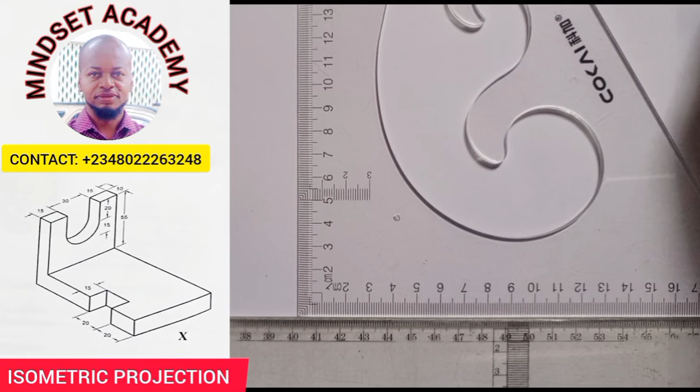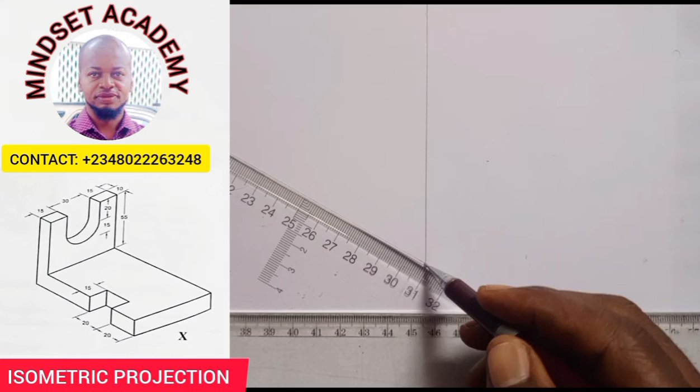When you hear the word isometric projection, the first thing you have to do is draw your isometric axis. Draw the vertical line this way, make it visible, and draw the inclined line at an angle of 30 degrees in this manner, and this also in this manner. So we need to now get our height, width and length.

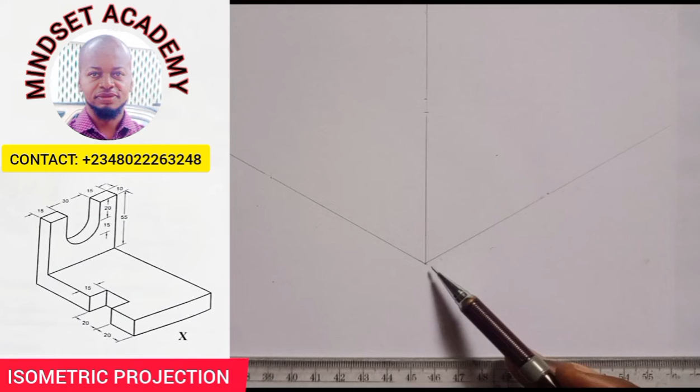Now with what we have here, how can we detect our width? From the top here, remember that everything you see along this direction is parallel. So if you look at this top, the entire top is given to be 15 plus 15, that gives us 30 plus another 30, that gives us 60. So my entire length here is 60. I'm going to measure 60 millimeter from this side.

So from 0 here, I'm going to measure 60. And this is where the 60 is.

Can you see that? And the entire height here can be given, since the thickness is 10, it means that the thickness here also is 10, because it is uniform. So if I add the 10 from here to here with this 55, I'm going to be having 65. So my height here is 65. So from this point 0, this is what we have here to be 65.

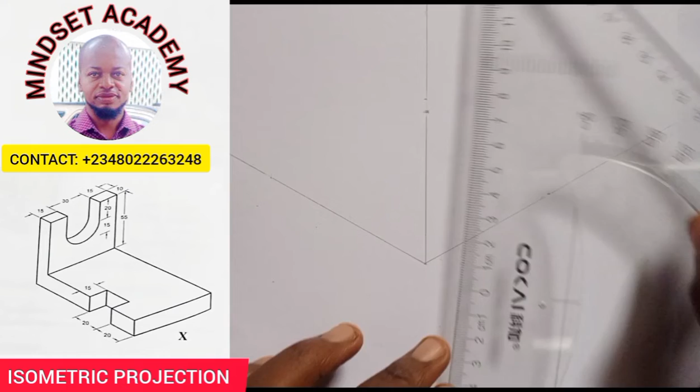Then the entire length here, as it is not given, we can see it is given to be 85. So since it is not given, so 85.

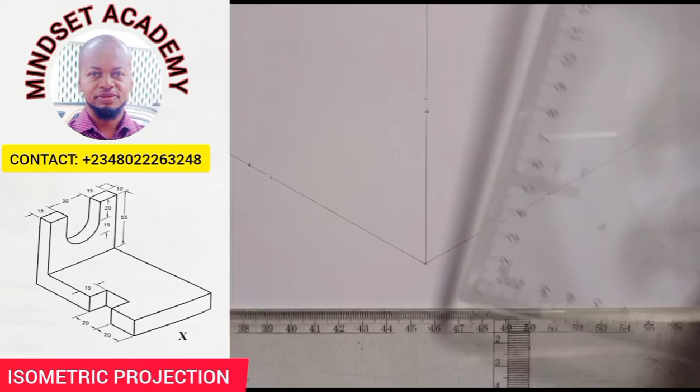Right, so we have from here to this point here, and that's 85. So I'm going to use this to form my box, in this manner. I need to form a box in this manner.

Easily bring it back. So this is the box that I'll take up a little bit so we have a clearer view. So this is what we have. So from here, I'll carve out my image.

And if you look at the image carefully, from this point to this point is thickened. So I can easily take my instrument and thicken this with my pencil.

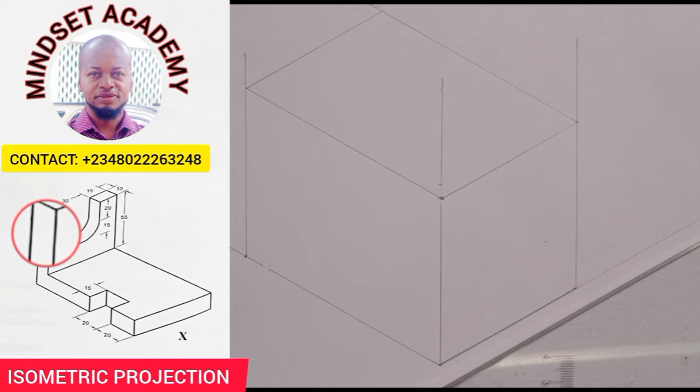Then the thickness here, from here to here, is not shown, but you see it from this top here. That is 10, meaning that everything all through is 10. So I'll measure a thickness of 10 at this point here.

So let me take that from 0 to here. This is 10. So I'll thicken it since it is thickened there.

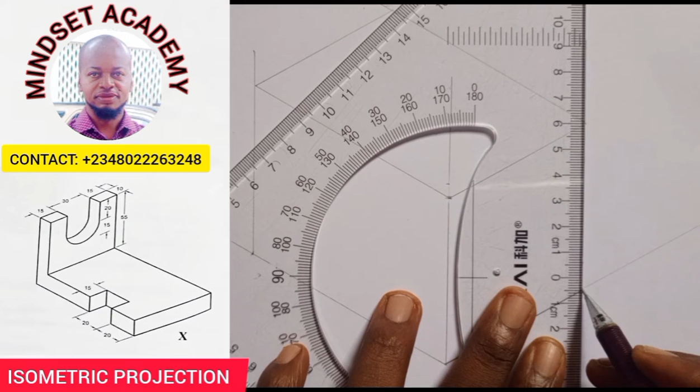Can you see that? So with the help of my instrument, placing it this way on my drawing, then placing this way, I can easily get the other 10. You just measure from here to here 10 and you join them together. You just place it this way and you draw 10.

Hope you can see that. And I've also taken this point to here, which is 10. Then here, I will take it as a faint line first, in this manner. Faint line first. Can you see what I've just done?

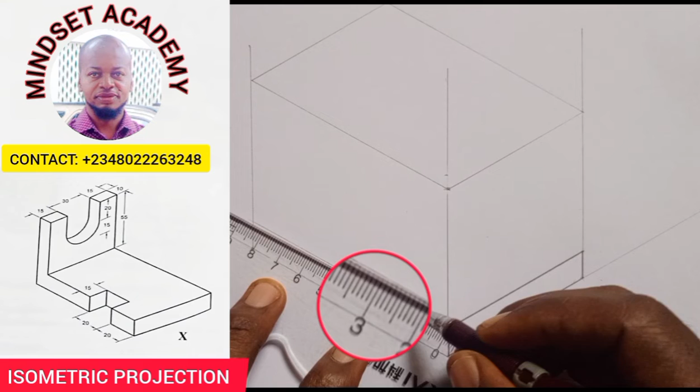Now the next thing, I'll just measure 20 and another 20 all through. Can you see that? I'll measure 20 and another 20 all through here. So first 20, let's see. From here, from 0, I have the first 20. Then from that 0 again, the next 20 is 40.

Can you see that? Then I'm going to bring them down with thick lines this way. So just take in here.

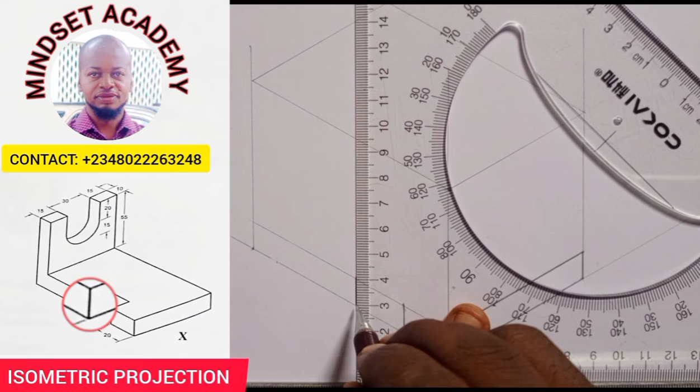And here also. Can you see that? And you can also take in from this point to this point, and from the end point to that point, as you can see from the diagram. Now the next thing is it's going in here by a thickness of 15.

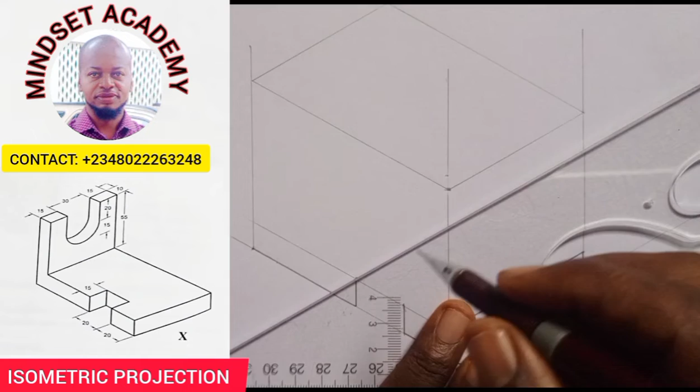Remember, you're working with your 30 and 60 degree set square. So you use this and take it in. And you come here also, you take here in.

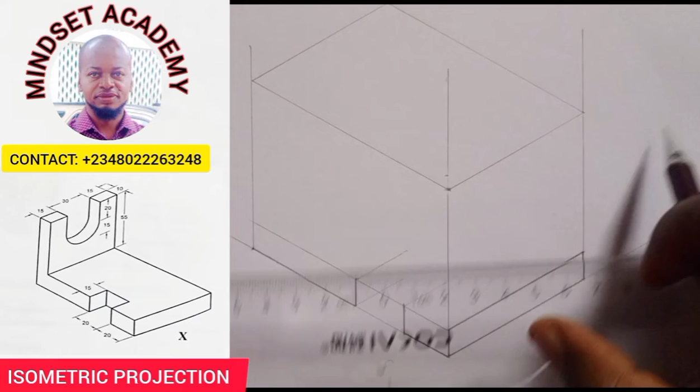So once you've done that, the thickness, the depth of that is going to be what? 15. So the depth from here to here is 15. So I will measure 15. So from 0 to 15, which I will take in. Can you see that?

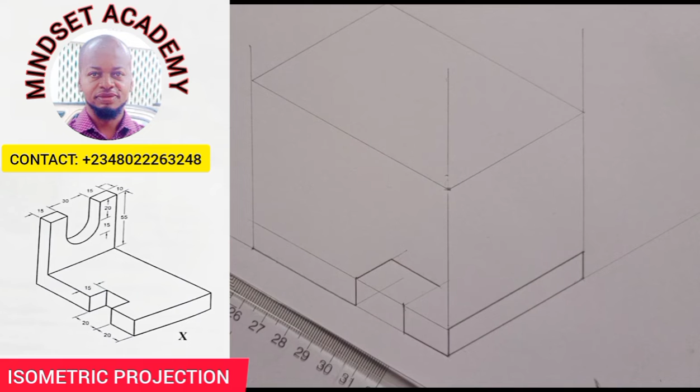Now I'll come here also. I'll join it from this point with my instrument to this point. So it means that from here to here is 15. From here also here is what? 15. And I'm going to take in here too.

Then I'll bring it down. And here too. Then take here in too. As you can see on the diagram. Hope you can see that.

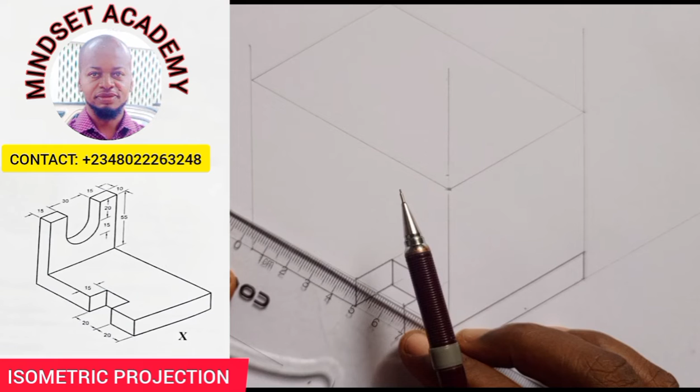Now you remember that from here to here is 10. From that point to that, from here also to here will also be 10. So I'm going to measure the 10 from this point here. From 0 to 10. So meaning that I'll take in from this point to this point.

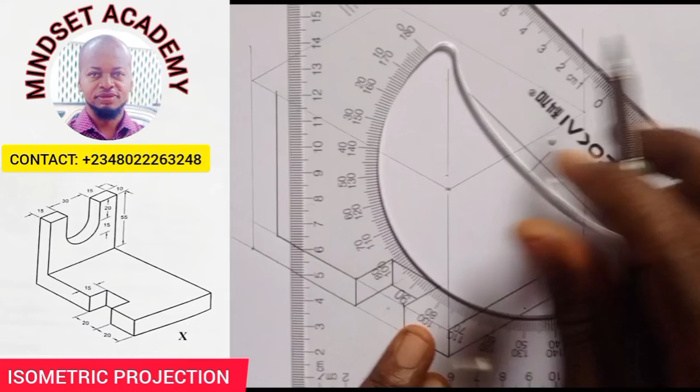Can you see that? And I'll take here up also straight ahead. And I'll also come here too. I'll take here up also straight ahead. And the next thing I'll be doing here is I'll also take in here too, as you can see from the diagram.

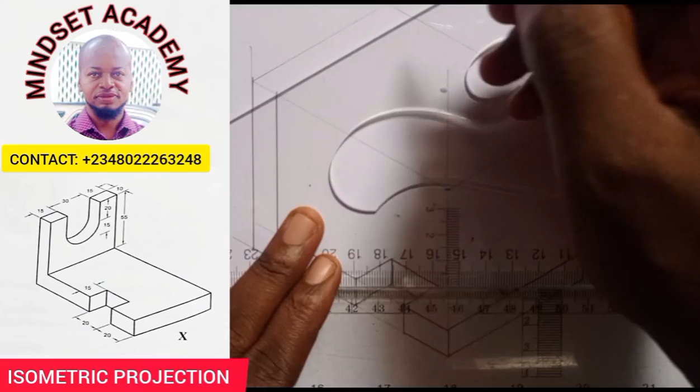And I will take this off, faint line first from this point. Can you see that? Now we are given that from this point I'll measure 15, and from this one I'll measure 15, making the middle to be 30. So one of the best ways to do this is to get the center point here.

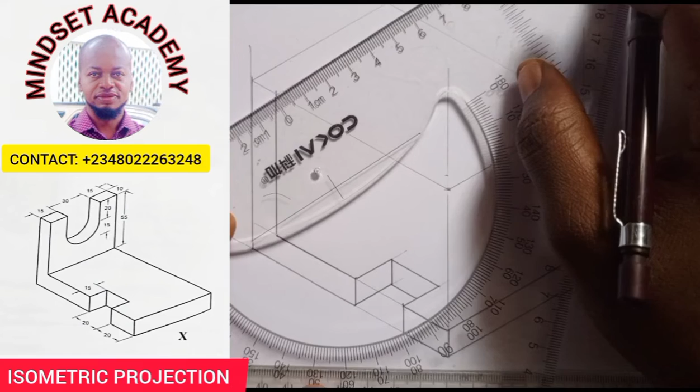Altogether, that will be the most efficient way. So how can I get the center point of 60? That will be 30. So from here, I'm going to measure 30. This is the center point here. And I am going to bring it down from here.

Then the next thing I'll do is I'll now measure what I want to measure. Since we are given the thickness at the center here to be 30, I'll take my instrument, my compass, and I'm going to measure 30 millimeters, I mean half of 30, which is 15.

From 0 to this is 15. Then I'll place it here. I'll mark 15 towards the left and 15 towards the right. Then from here to this point is 30. Hope you can see that.

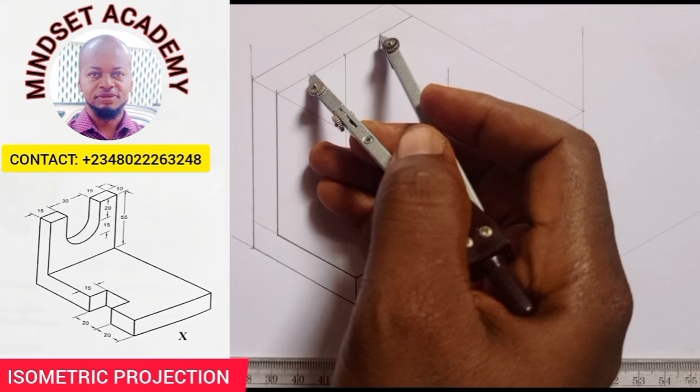So I'll place it here. I'll just mark the left both 30. So I can just use this to bring out my box altogether. So once I place it here, I'll bring here down and I'll bring here down.

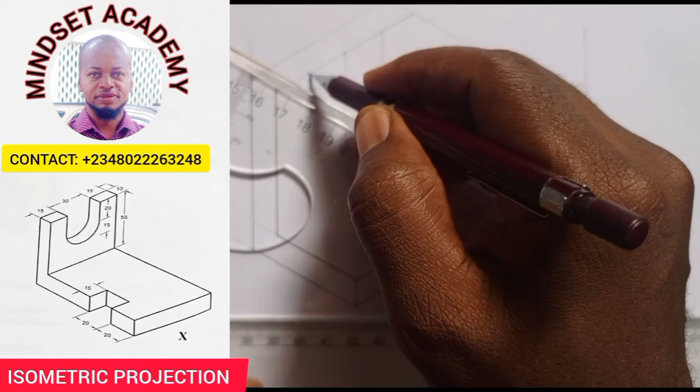Hope you can see that. Then I'll close it up too. Can you see that? And I'll close it up too. I'll tick in this point. And I'll tick in this point too. Now ticking here too. And also here too.

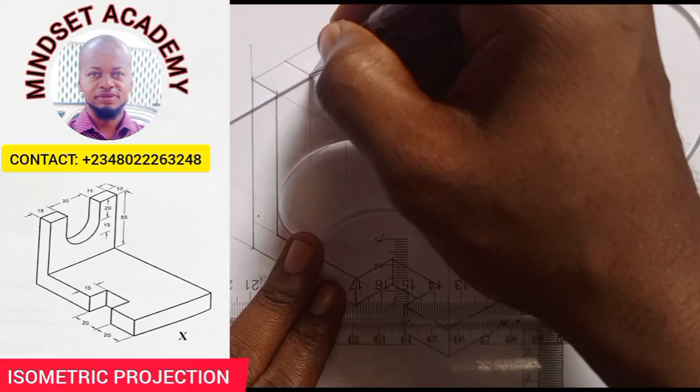Then I'll also tick in here too. Then here. Then here. Are we there? And I'll take here down, which I'll use this to close it up. Then here also. Which will give me this.

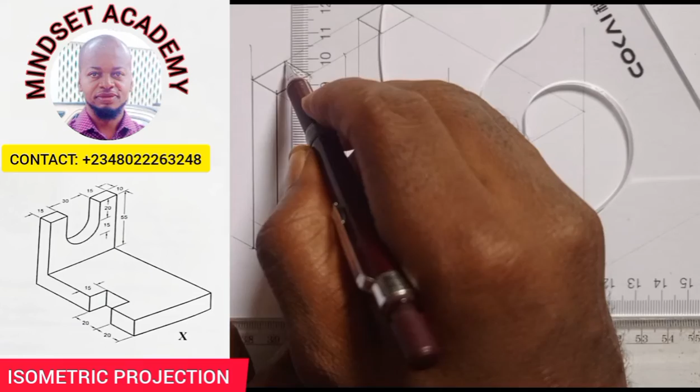So all this I'm doing here is a faint line. So now why am I doing this? Because of that curve you can see at that particular side. So because of that particular curve we're seeing here, before we do anything, we were told earlier that from the top here straight down will be the center of that arc.

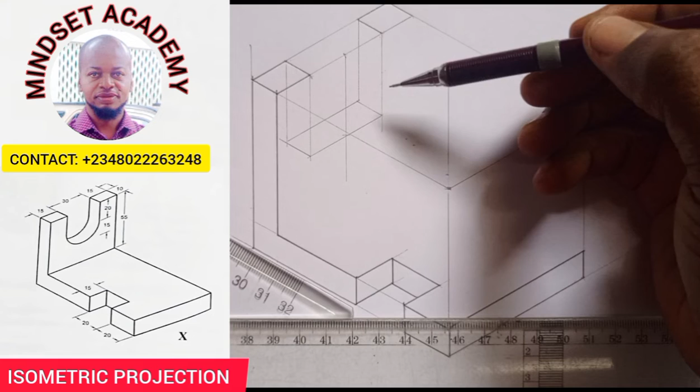Are you with me now? From here straight down will give the center of that arc. So that's what I'm going to do. So let's measure 20 downward. They will now measure 15 again, right? So let's do that.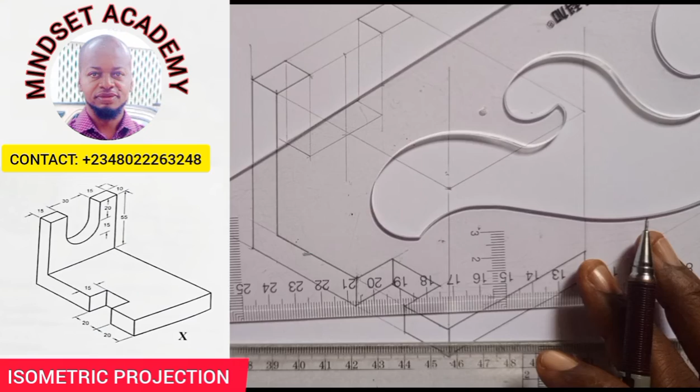So first of all, I'll measure 20 downward. Let's go down first from 0 to 20 downward here. That 20 will be the center of that figure here. So meaning that this part you see here

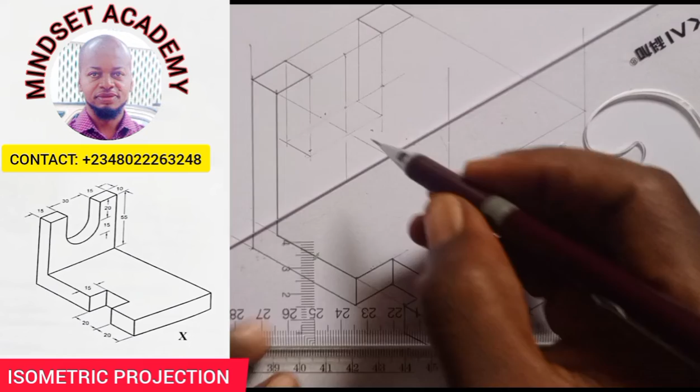is the center of the circle that we need. See, I draw a line from that 20. So I don't really need these two. Let me dent these two here. So from this center here, measure 20 down. So if I take my instrument, I'll measure 20 down from that point. After I measure 20, then I'll measure 15. So this from here, 0, and this 15 here.

Can you see that? I measure 15 downward here. So the next thing I'll do here is this. From this point to this point is 15. Here also is 15. From here to this point, we see it is 15.

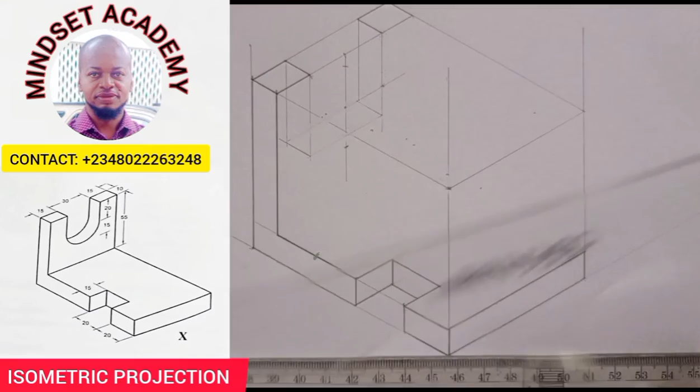All together, now use it to form a box. So you just take your instrument and draw out the box that ought to be there. So this will come here this way, and this will come here to join this. This one too.

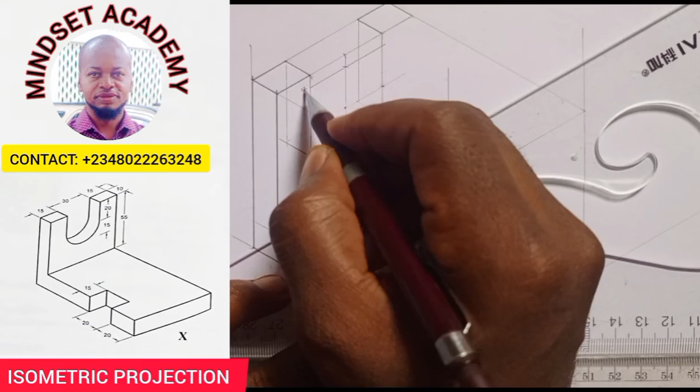So where they meet here, this will be point 1, to be point 2. Let me call it to be what? point 3. Now close it up. So where it meets here, let me call it to be what? point 4, point 5, point 6, right? And here I closed. Here will be 7 and 8. You don't have to do all this.

So after I've done that, I'll take my instrument and join 1 and 5 diagonally, passing through the center. And I will now join from 2 to 8. Can be in any order from here to here.

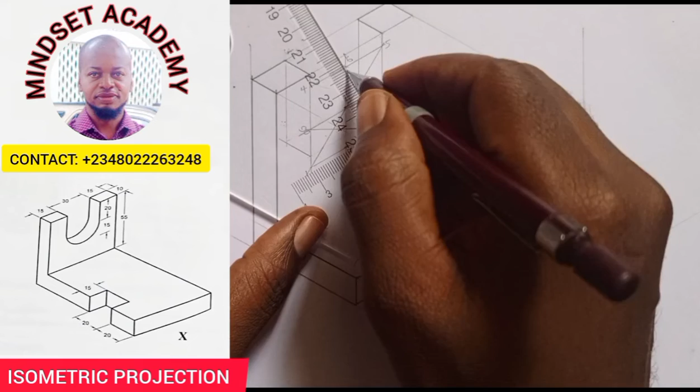Now join from 2 to 6. So they are meeting at this point here. This is where my compass will now come in. So when I place my compass here, I'll connect from 7 here to 3. Hope you can see that from 7 here to 3.

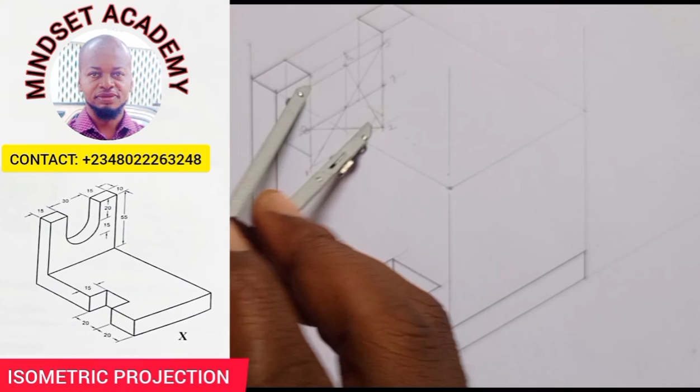And where it intersects here, I'll place it here. And now connect from 3 to 8, from 3 to 8 all together.

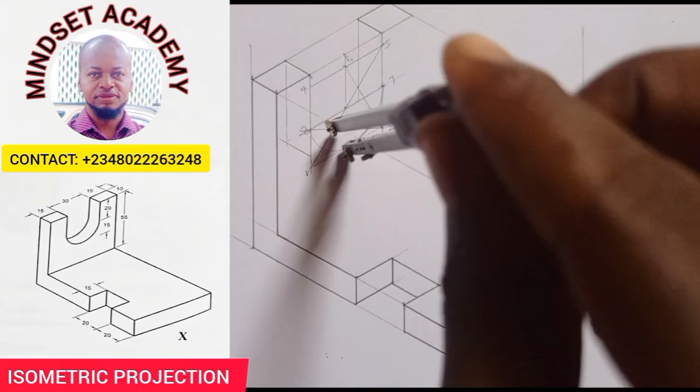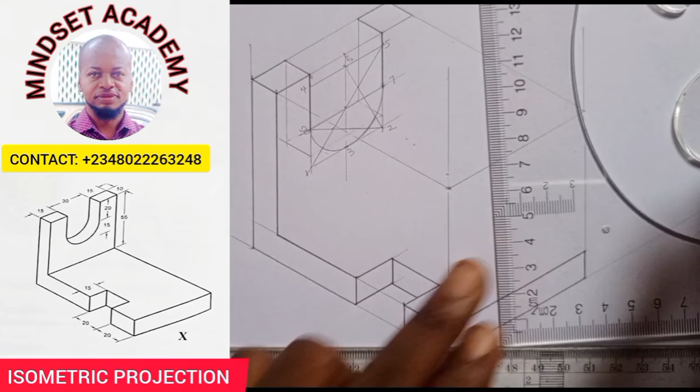Can you see that? Then I can easily thicken it. First of all, let me thicken from this point straight down to here. And from this 8 straight down to here. Right? Then I'll thicken here also. So let's do that. Hope you can see that.

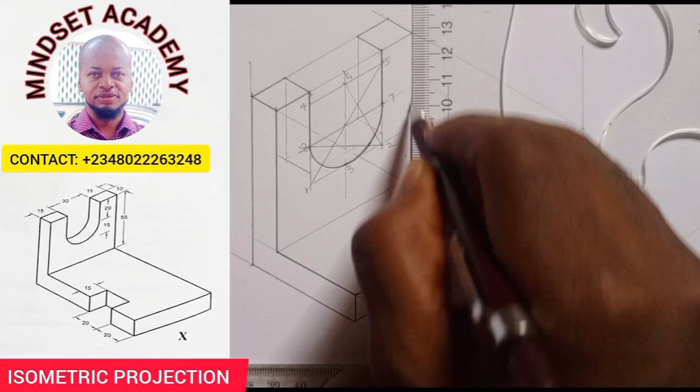So the next one is we're going for the one inside. But if I go for the one inside, let me just draw this line here. From this point where they meet, I'll draw a line that'll go like this. And at the last point here, I'll draw a line that will come down, where I'm going to close it up. And also close it up.

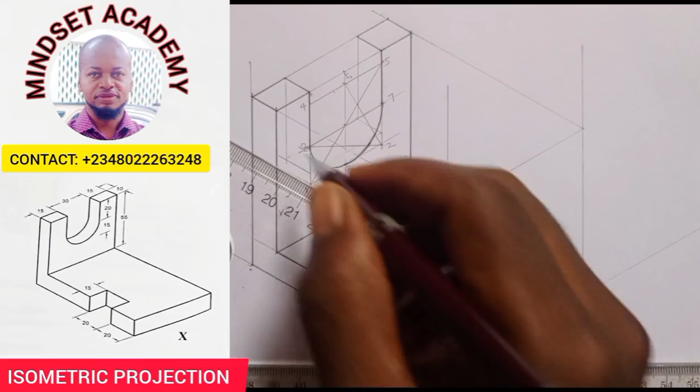So to draw the inner one, so to get the inner one is not as difficult. Just take this line here, take it in, and bring this other one out. So this is where it's meeting.

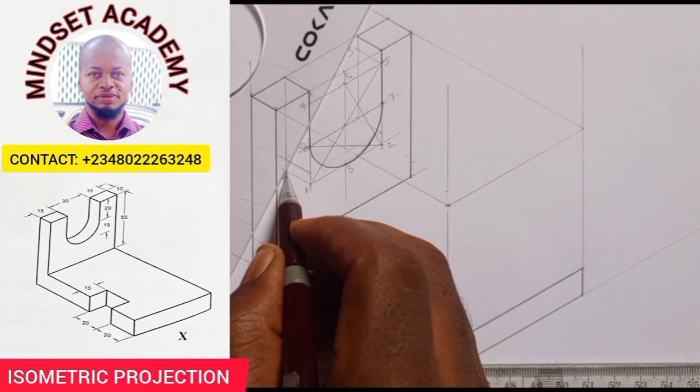Now join this. Since you join from here to here, extend this 5 here to meet here. Can you see that? Then that will be your new 5. So this will be your new 1. So connect from 1 to 5 this way.

Then you can easily transfer the point. And this point you see here, our new 4, just mark here. This point you see is 4. So I can easily take my compass from here.

Place it here. Since I use this 4 to get this arc from here to here, can you see that? So I'll use this 4 with the same measurement. I'll get the next point too.

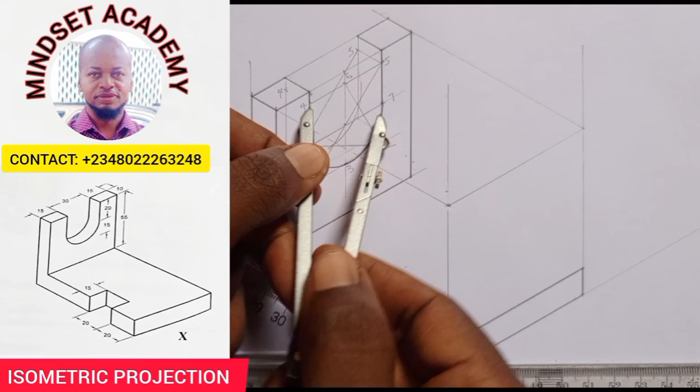All together. Let's come again from this point. I got this arc. Then from the next 4, I'll get the next arc. Let me make it more visible.

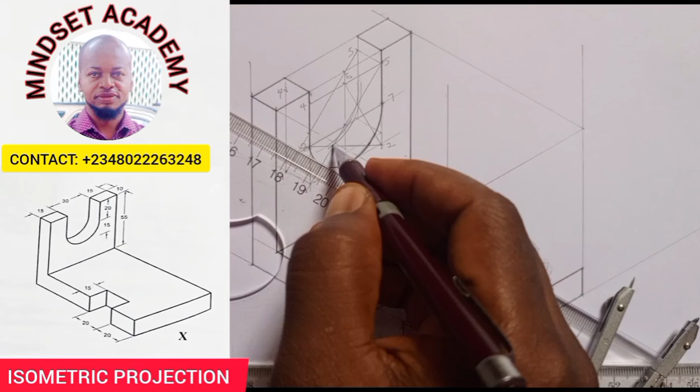Right? And this point here, where they meet here, I'll mark on this inclined line. Because on this inclined line, we have this point. Then I mark here. So I'll just take my instrument. It's not really, since I use this to get this.

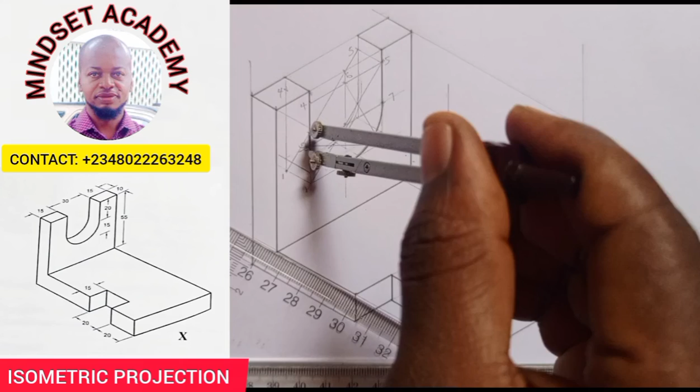Can use this to get this. I'm going to use this to get the next point. I'll just stop here. So let me thicken it out. And you just close here up.

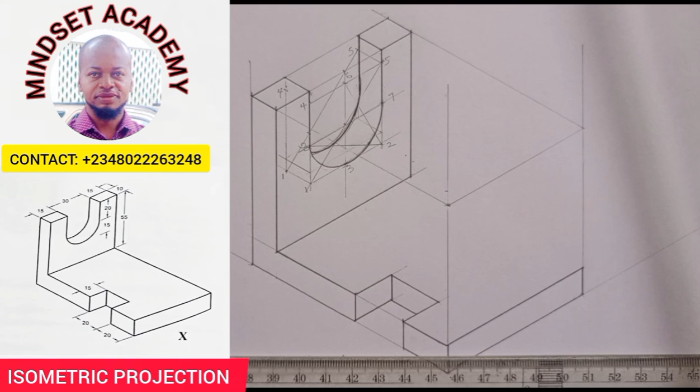Right? So this is what we have here. So I'll just close here from this end straight down to this end.

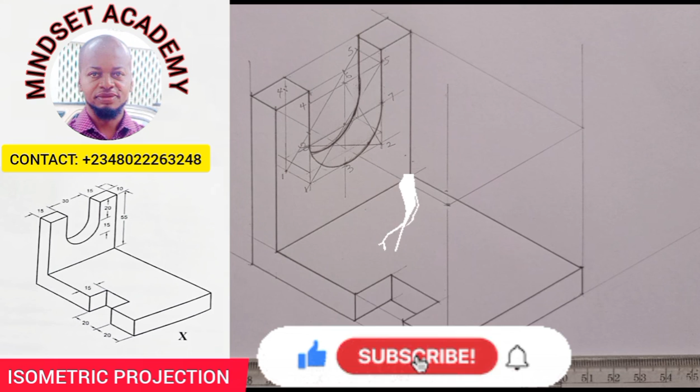Right? So this is the isometric projection of that given figure you can see on the screen.